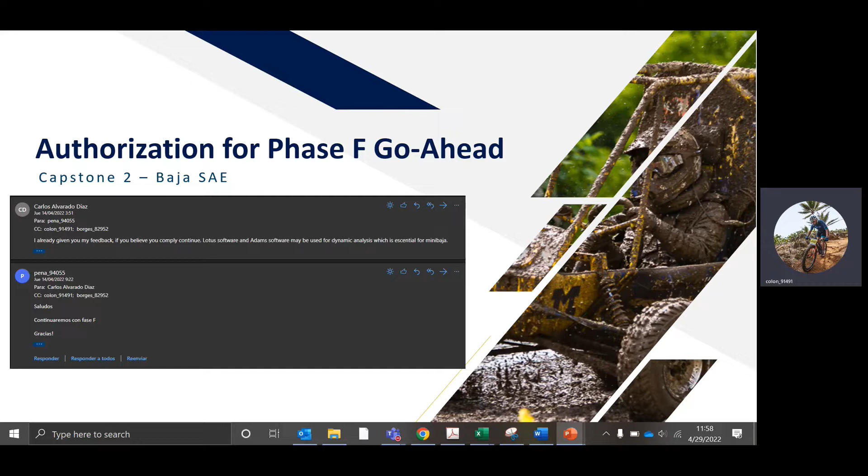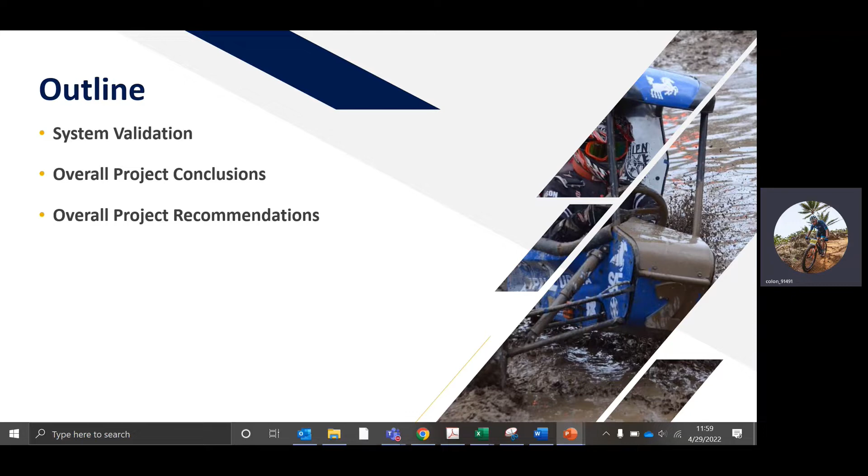We present the authorization to continue with the final phase. In this presentation, we will be discussing the following topics: system validation, overall project conclusions, and overall project recommendation. In the following slide, we'll be presenting in detail each MOP of each subsystem, in which it will be analyzed when the validation type is completed and if it passed or was rejected.

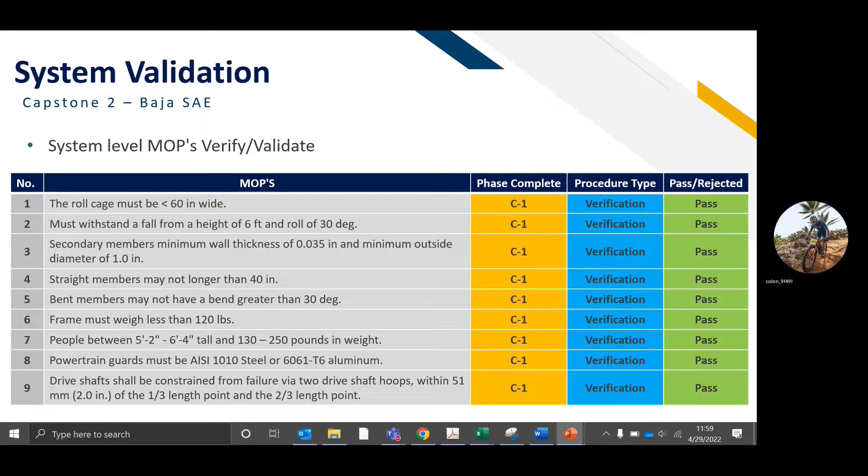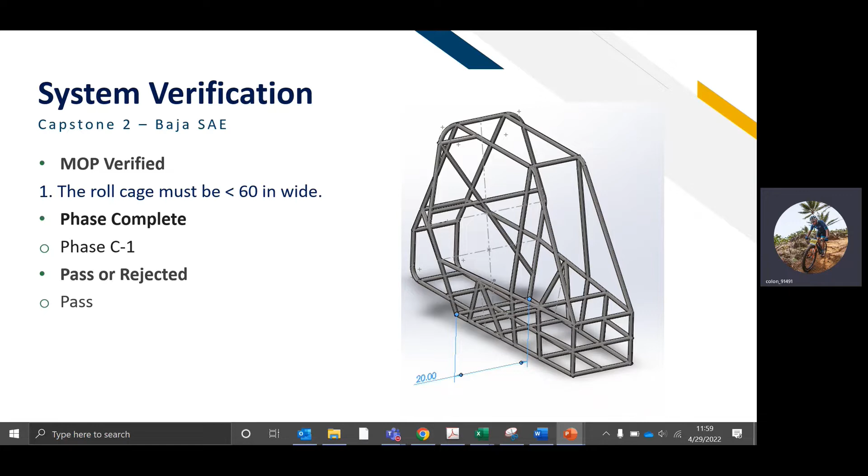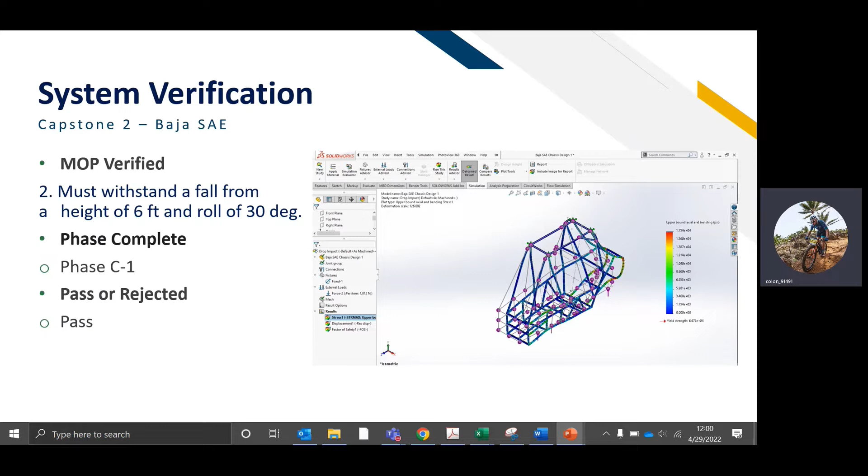The first MOP is from the chassis subsystem. The roll cage must be 60 inches or less in width. This MOP was completed in phase C1 and it was approved. The second MOP is from the chassis subsystem: it must withstand a fall from a height of 6 feet and a roll of 30 degrees. It was completed in phase C1 and it was approved.

The third MOP is from the chassis subsystem. Secondary members minimum wall thickness of 0.035 inches and minimal outside diameter of 1 inch. It was completed in phase C1 and it was approved.

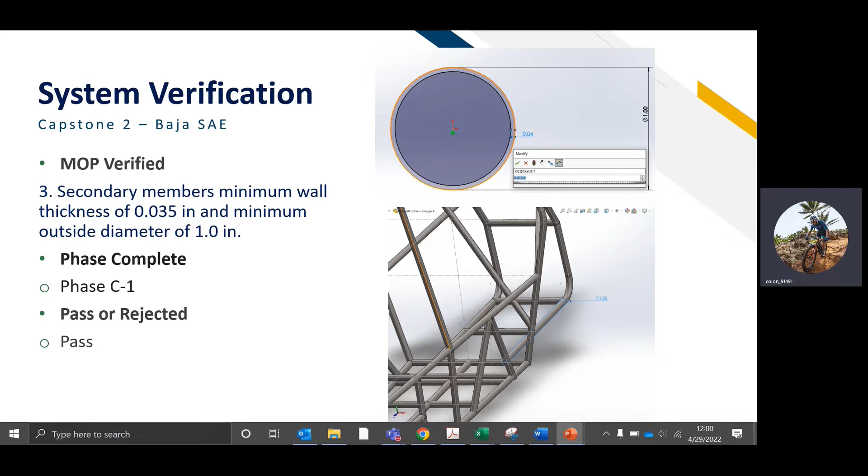Hello, my name is Anthony Peña, and I continue with the system verification. The next MOP verifies that the straight members may be no longer than 40 inches. This MOP is complete in phase C1 and passed. On the right, the longest dimension is 32.16 inches. Continue.

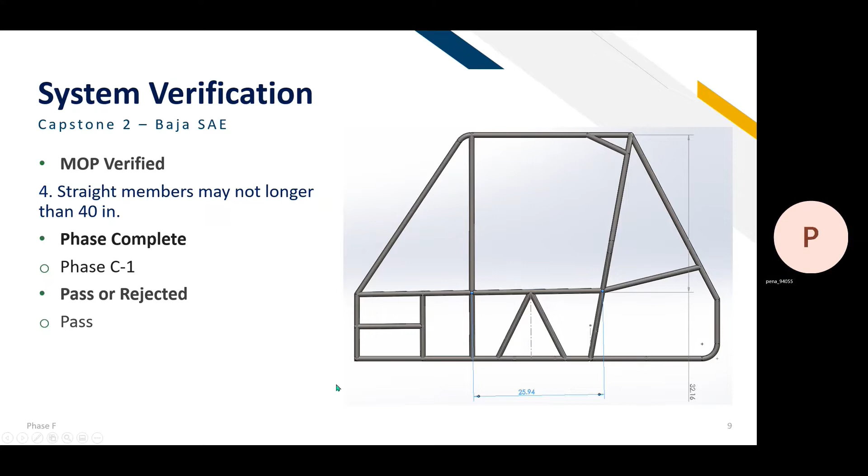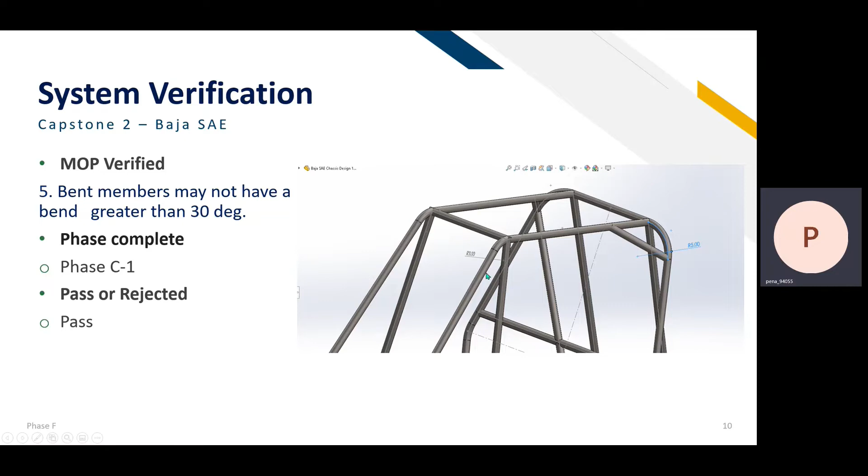Okay. Bent members may not have a bend greater than 30 degrees. This MOP was completed in C1 and passed. On the right is the angle. Continue. People between 5 feet 2 inches and 6 feet 4 inches tall and 130 to 250 pounds in weight. Complete in phase C1, passed.

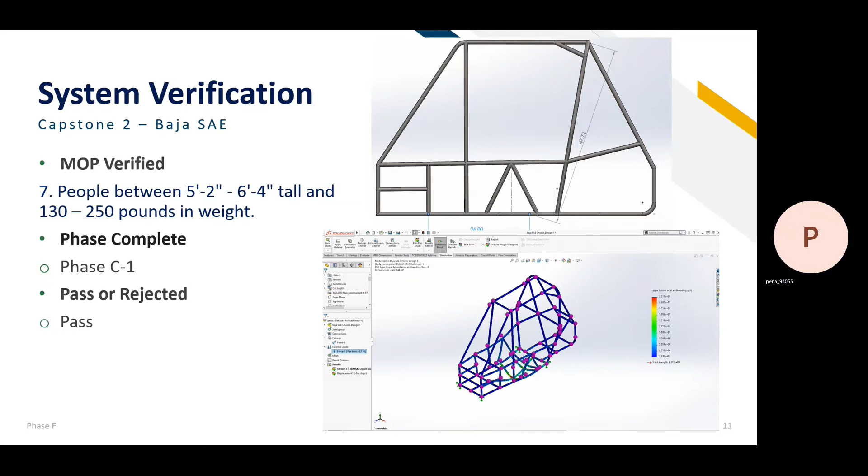Okay, continue. The powertrain guards must be AISI 1010 steel or 6061 T6 aluminum. Phase C1 pass. This case is AISI 1010 steel.

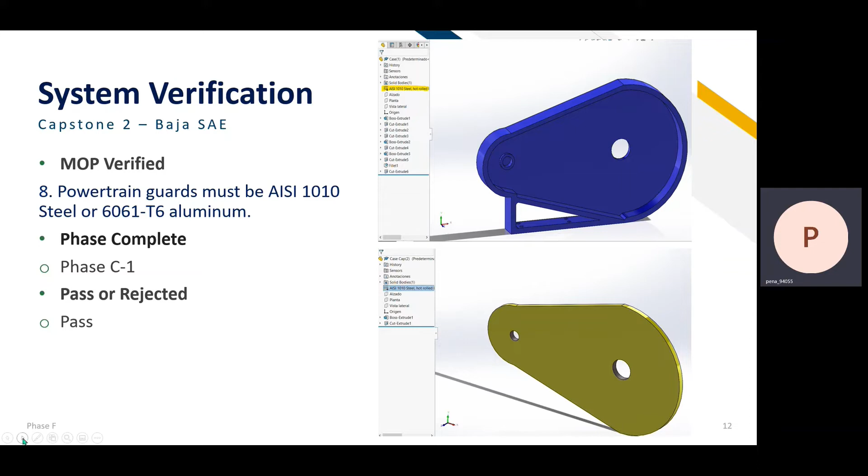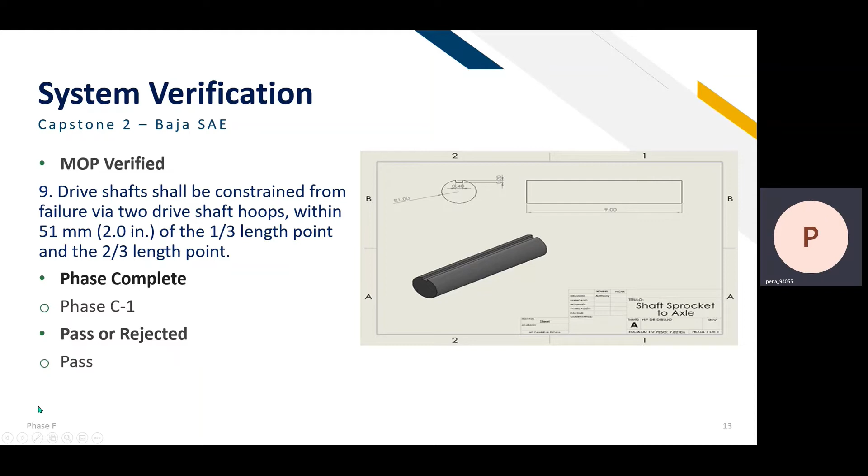Drive shaft shall be constrained with 2 drive shaft hoops, 51 millimeters, at 1/3 length points and 2/3 length points. This MOP is complete in phase C1, passed, and the dimension is 2 inches. The drive shaft hoops shall be a minimum of 1 inch wide, meeting the same material requirement. C1 complete and passed. The dimension is 1 inch.

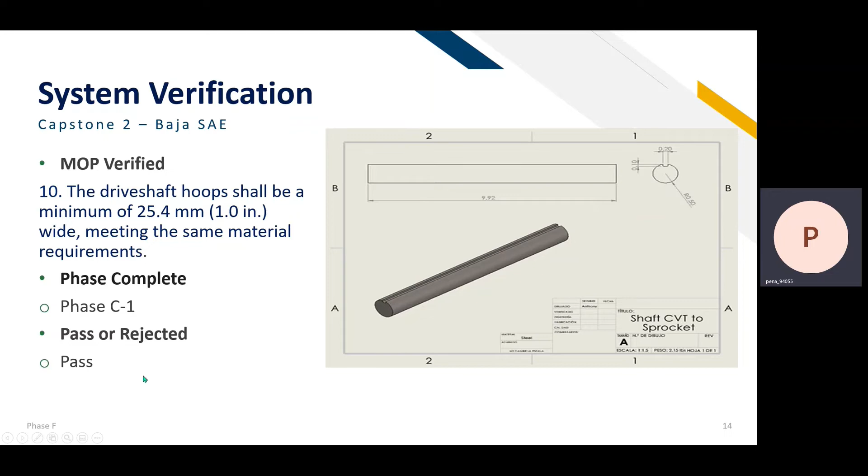The next MOP is the powertrain system must be able to handle a total weight of 1,000 pounds maximum. This MOP is complete in phase C1 and passed. In this case, it is the mass of the car. The maximum capacity for the car is 725 pounds.

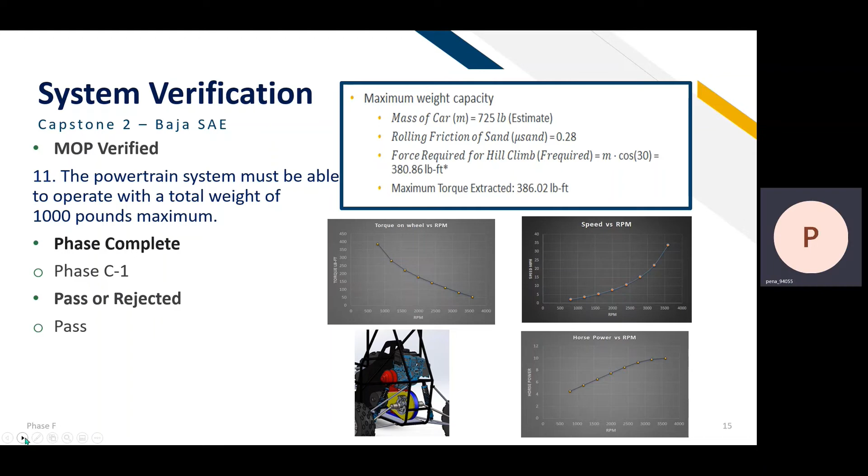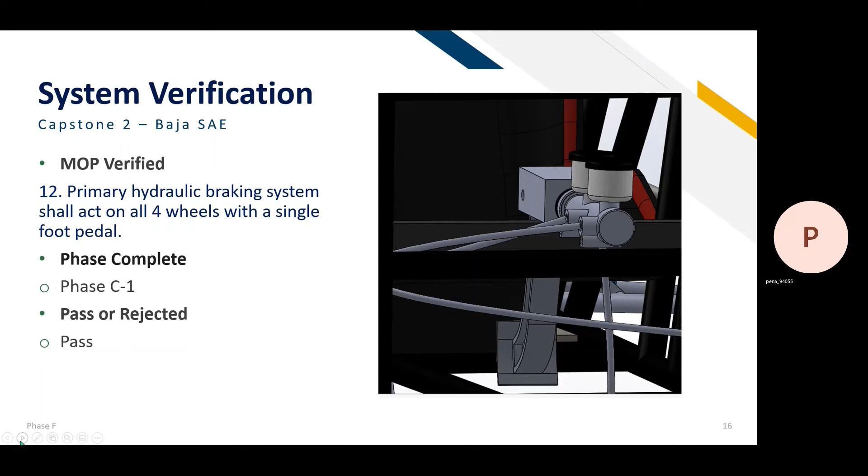Good afternoon, my name is Jose Borges, and today I will be presenting phase F of our Capstone project. For the system verification of the braking system, the 13th MOP is that a 5/8 inch master cylinder shall be operated directly by the pedal. In phase C1, we designed a mounting box to assemble the master cylinder and the pedal. Also in phase C1, the correct calculations were made to make sure the 5/8 inch master cylinder provided the necessary force to the caliper to make the car stop at maximum velocity.

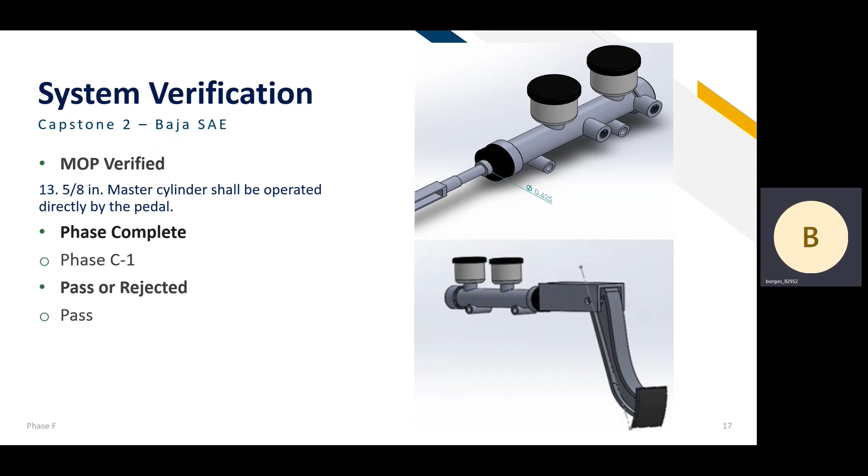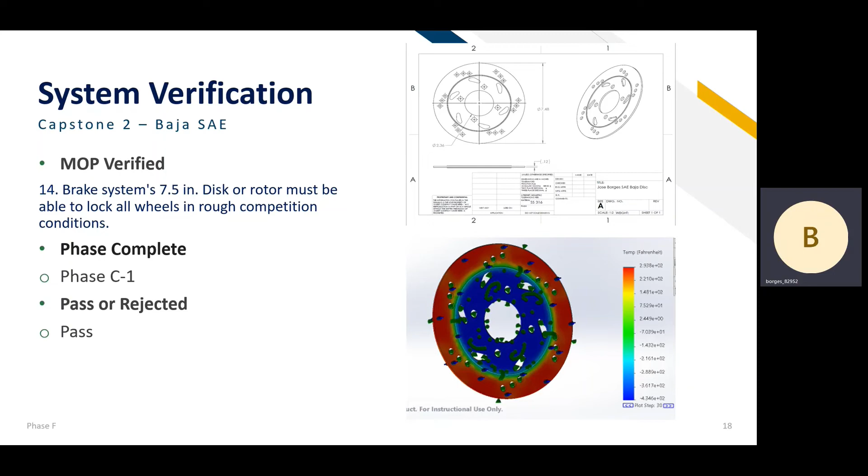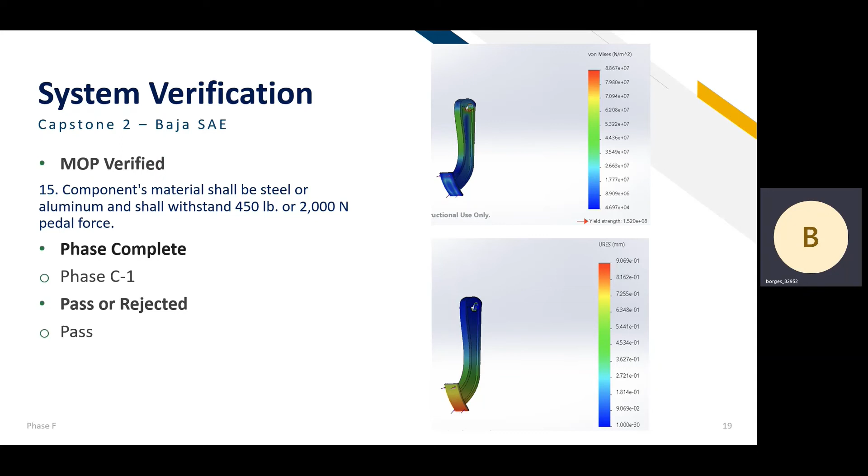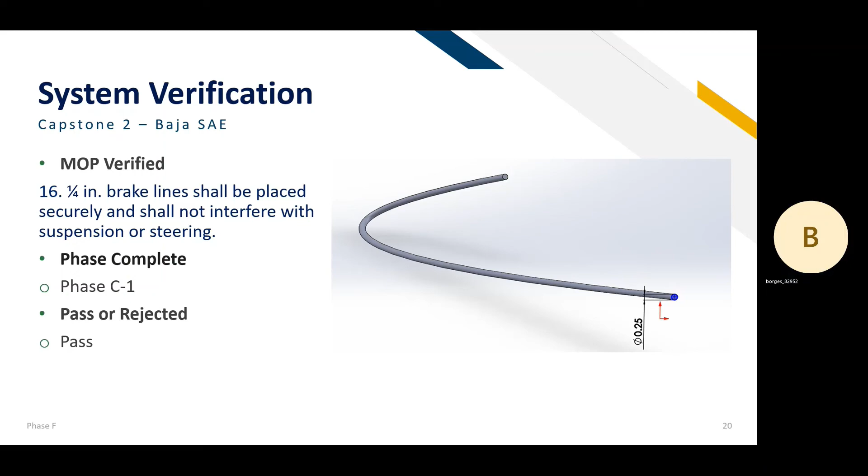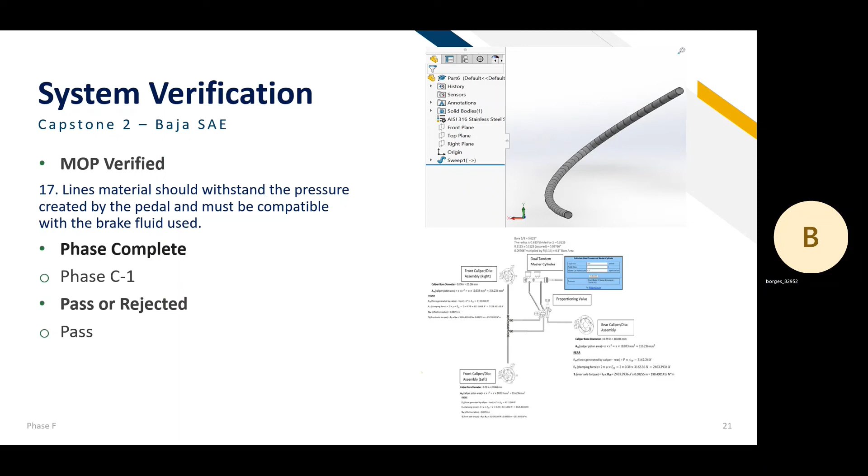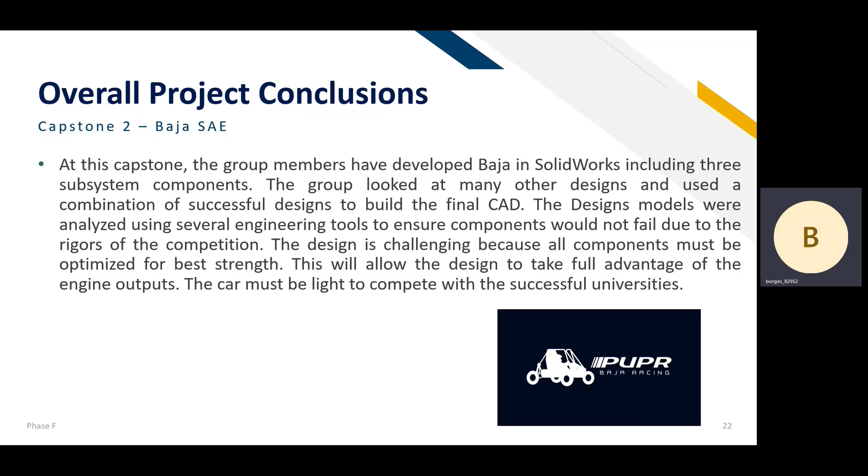Here we have the overall project conclusions. We designed and assembled a Baja in SolidWorks. We divided the project into 3 subsystems that were chassis, powertrain, and brake system. We used a lot of information as reference to complete our project final design. We then used all the engineering components and analysis to prove our Baja will perform properly and will be able to compete at the highest level with other universities around the world.

Finally, we can recommend to future teams to complete phases and keep adding all the information to the final report. Also, implementing a four-wheel drive will cause a better performance of the SAE Mini Baja. In our case, we could not manufacture the Baja, but another recommendation will be for the other groups to manufacture it so the validation process can be completed.